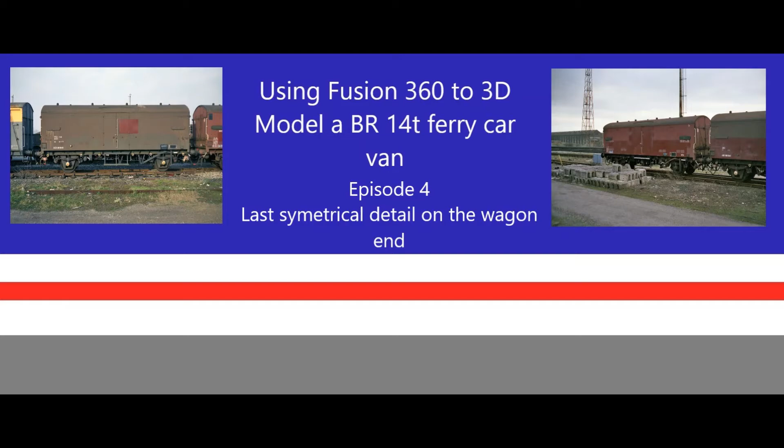Today's episode we're going to continue working on improving the detail on the end of the ferry van that we've been drawing. So first thing we're going to do is have a look at some pictures.

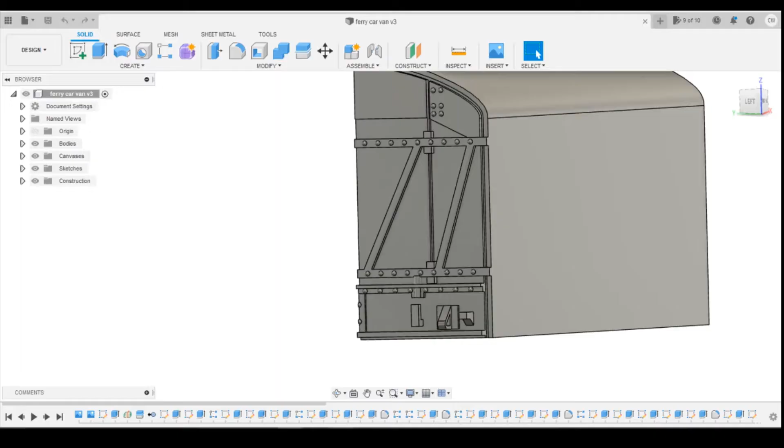I'm thinking of starting off by adding in some hinges around the top here and the bottom. So we're just going to create a sketch on the back surface here. Looking at the shape, we use a slight flat panel with a rivet on it, and then one that comes out above that. So we're just going to create a rectangle on the top here.

I think I'm going to go for 0.7 millimeters on that one. Oh, that snapped, unfortunately. Right, let's try again, go back into that sketch. You see it? Okay, cool. So 0.7 high, 0.3 wide.

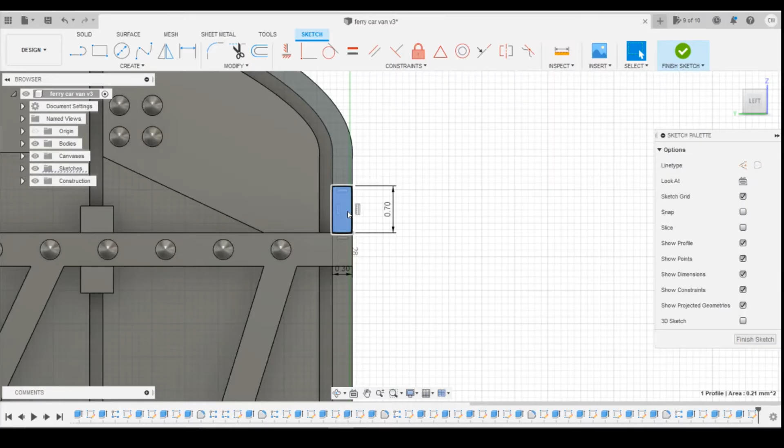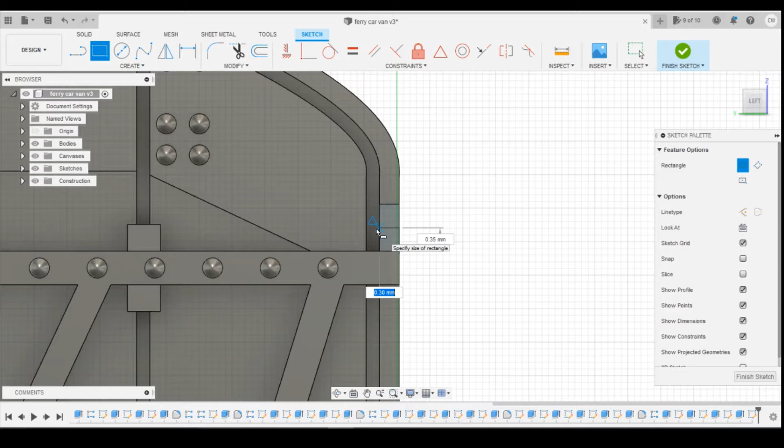Okay, and we'll extrude this just coming up slightly, I think maybe 0.15 would do. And create another sketch on there, again using the rectangle tool. I think I'm going to go with 0.3 by 0.35, and I'm going to extrude this outwards. I'm thinking 0.4 will look okay.

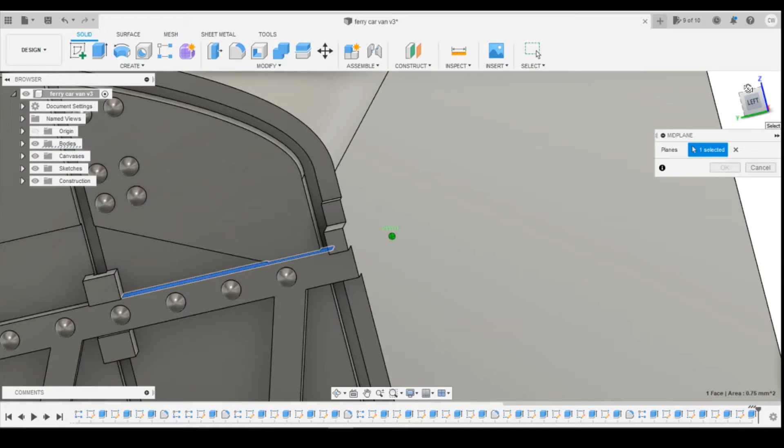And just to make life nice and easy, I'm actually going to put a midplane and copy what we've just done. Put a midplane between those two top and bottom surfaces there. Okay, and then we'll be able to copy this down. Actually, we will put the rivet on here first.

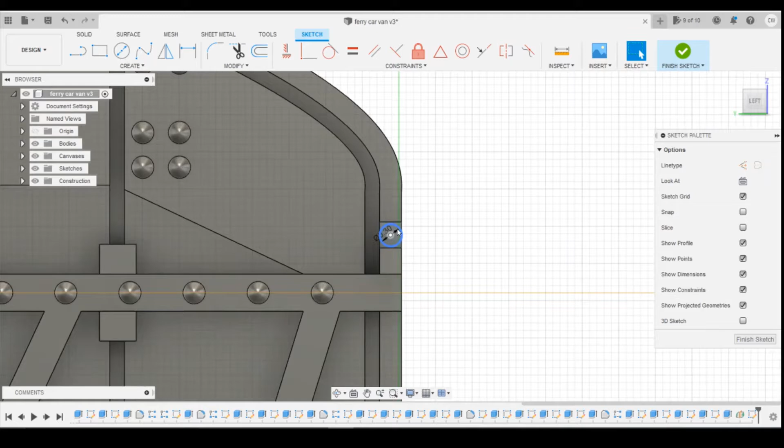Let's find the midpoint. Go 0.3 again. Extrude it 0.15 and then fillet off the top, 0.15.

Okay, and then as I say, we can copy or mirror this over. So, mirror, and then we're going to do features. I'm going to select, I also want that, and I'm going to mirror the plane across. Let's put the whole body over - we don't want that.

So let's do edit feature - that's already a new body, that's fine. Edit feature, and we'll do new body on that as well. Okay, that should work out.

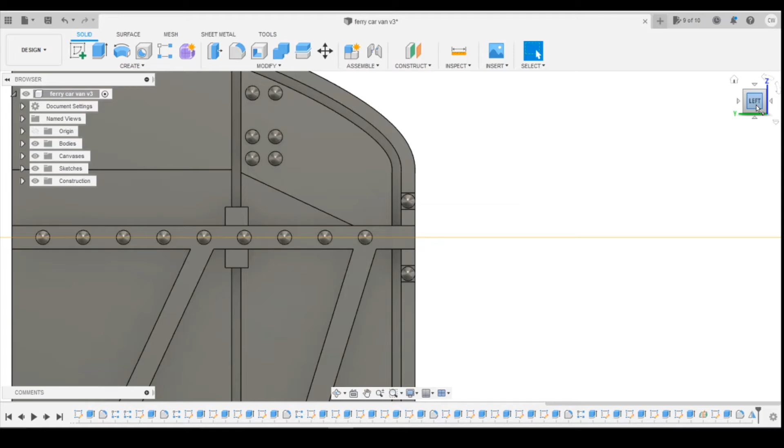So again we'll try that mirror, selecting that feature and the faces. Let's try again. Mirror plane, being the one just added there. Click on OK. Cool. So we can then turn that midplane off.

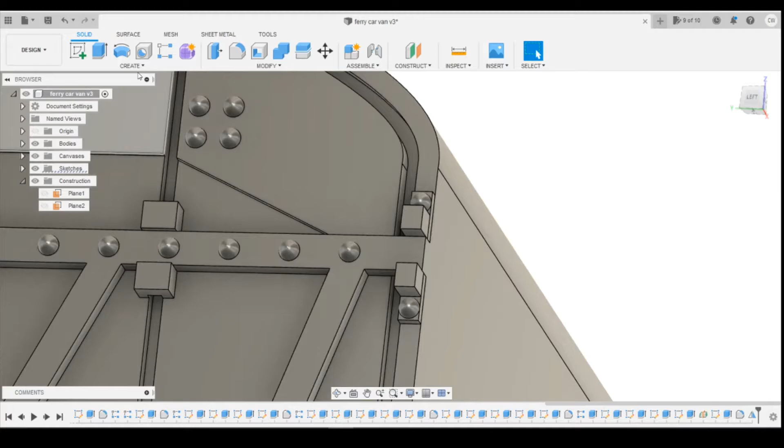And then I'm going to add in the middle here. In fact, let's finish that sketch and we'll delete that sketch. I'm going to add a drawing onto that side face. I'm going to slice through and put a circular profile, maybe 0.3.

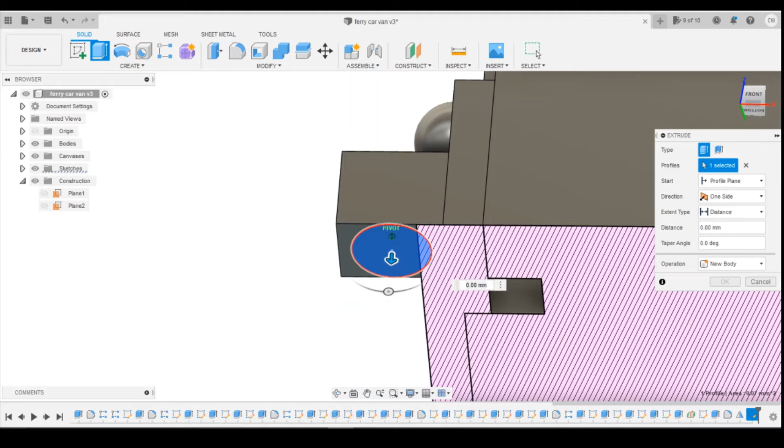I'm going to extrude that down, tell it to join. Okay, haven't gone far enough, edit that down again, and just drag it into the bottom of the hinge there. There we go, so we've got that now sorted.

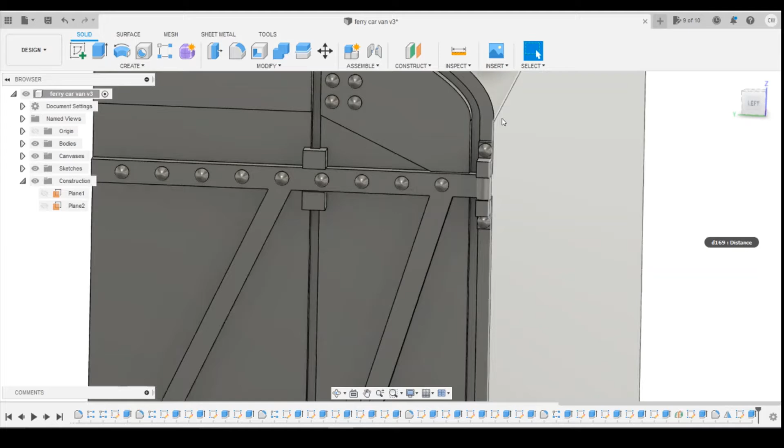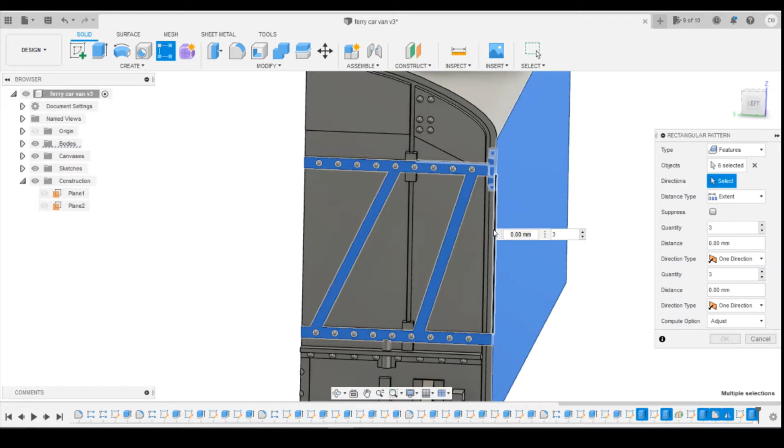We're going to copy the pattern. Select the features, I'm going to select all of these slots. Hopefully it won't do this. Direction down - it is.

So what's caused that? Let's have a look at this. Edit that feature there - that's fine. Could be, yes, that one. Edit that feature, tell it to be a new body. And then we can pattern all of this.

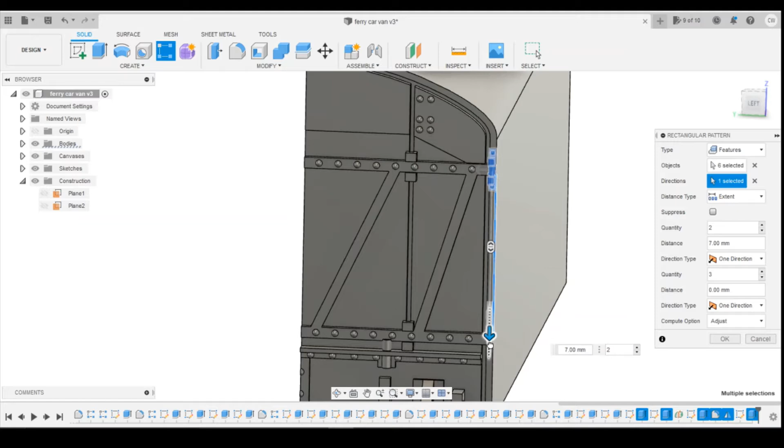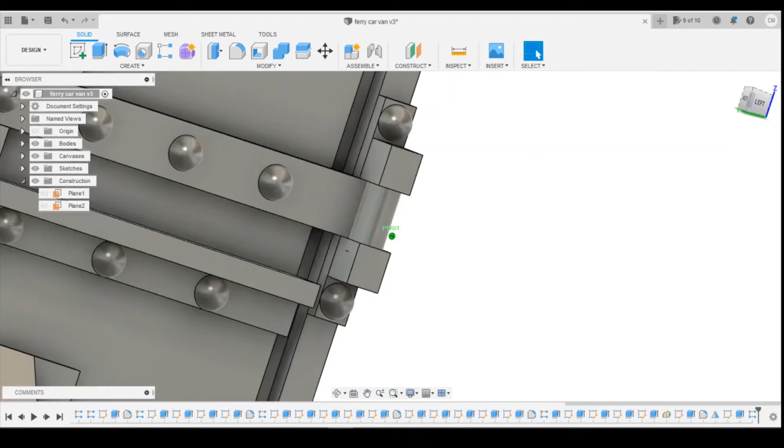There we go, let's select faces. Good, direction downwards, two of them. I think it was 7mm we came down last time - 0.75 actually. Yeah, there we go. Okay, that looks good to me.

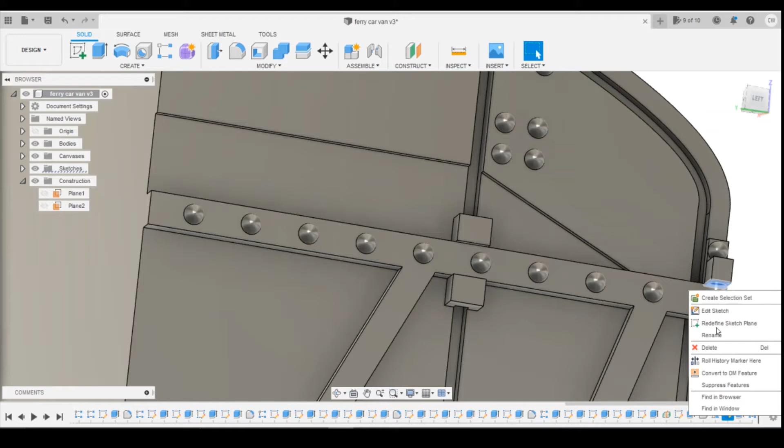It's weird that these are slightly sticking through here for some reason. Weird. Let me just edit scale on that one - I'm just going to reduce the diameter of them.

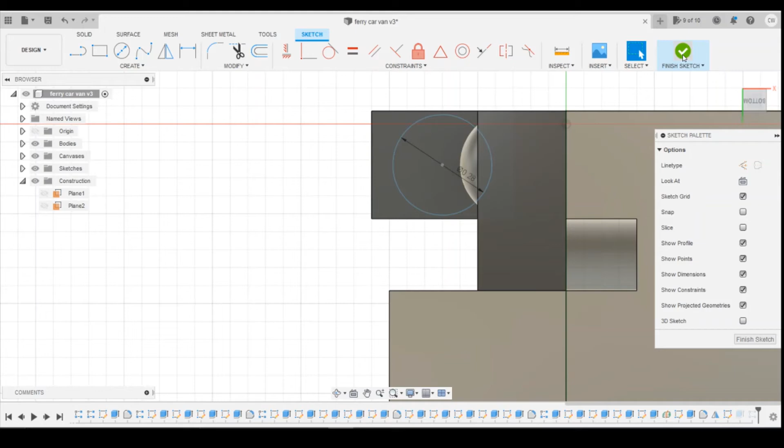So 0.25... 0.27... 0.28. Okay, so they're not hanging out now.

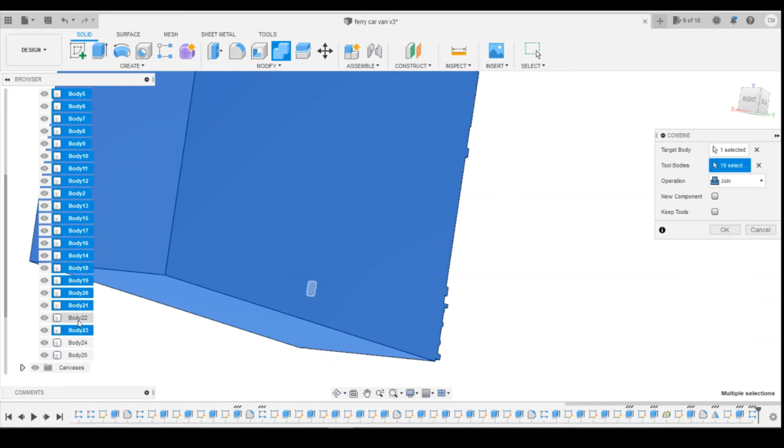That's good. Now if we check the bodies, do we have one? No, we've got lots. So we're going to keep body 2 as the original, combine, and we're going to add in as the tool bodies all the rest of them. Click on OK, that all joined together now.

Okay, so the next thing I'm going to add in is the handrail that's on the side here. So we're going to come onto the side and create an offset plane from the side face, and I'm just going to bring that in, say maybe 0.15, and put that in the middle of this face here.

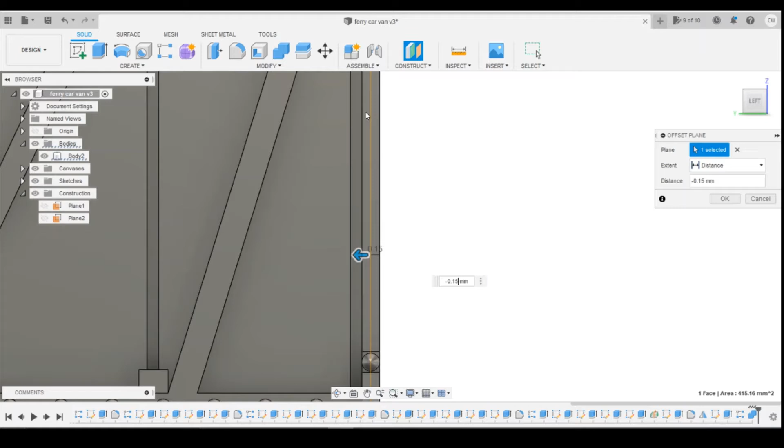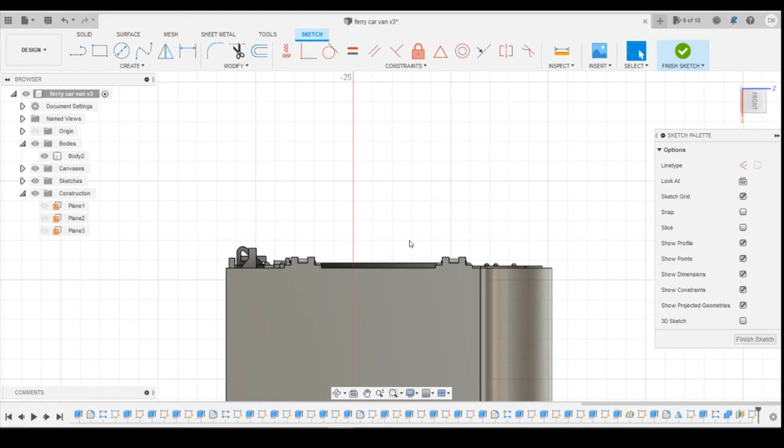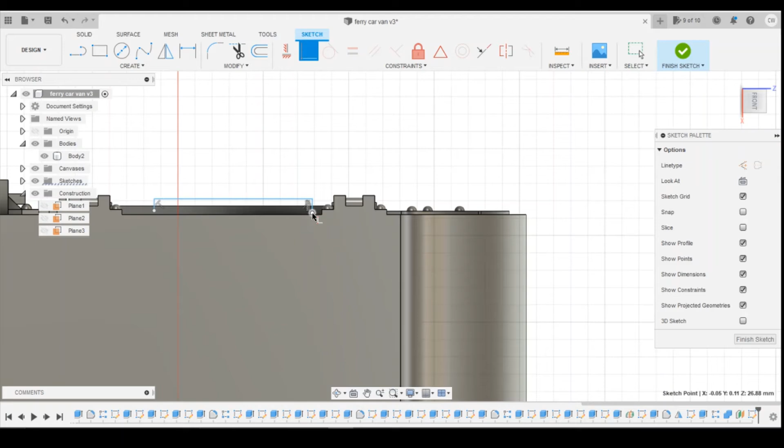So creating a line. I'm going to create a line upwards, across, and back down. Let's escape to get rid of that tool, and then we're going to coincide those two points like that.

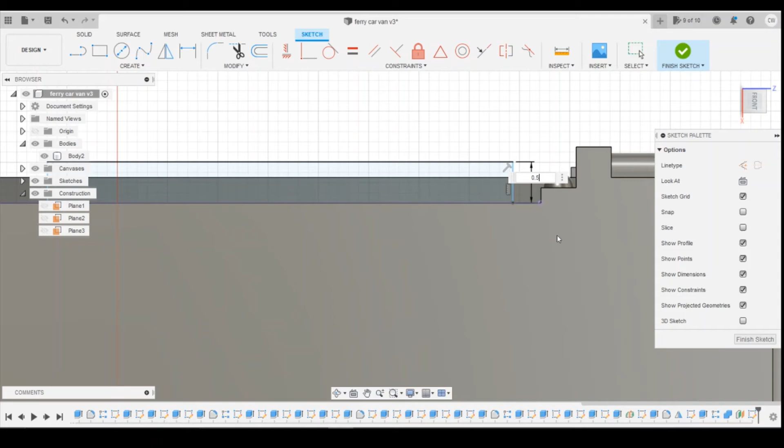Dimension wise, let's go have a look, see how high it looks. So it comes out sort of similar height to the hinge. At the moment it's 0.4, I'm going to go maybe 0.5, see how that comes up. Yep, looks okay.

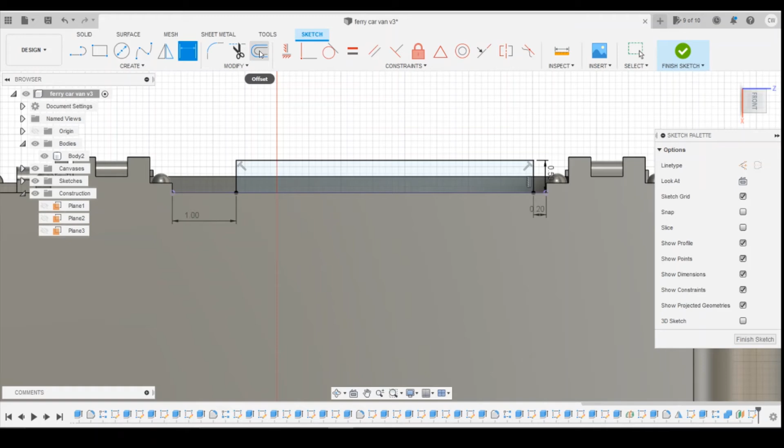Distance from the corner here, I'm going to go for 0.3. Actually no, 0.2, I want it really close to the top there. And from the bottom we'll go for 1mm. I'm then going to fillet it off the corner, maybe 0.15.

A bit more, I think, than that. Yeah, let's go for 0.3. Same on the other corner, 0.3.

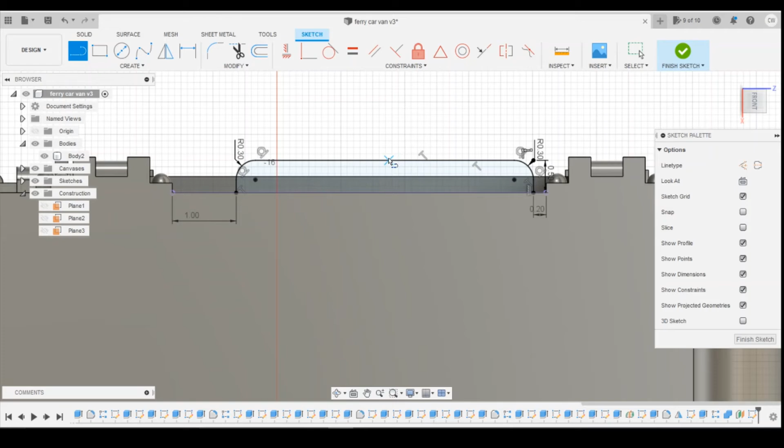And then I'm going to put a line. I'm going to find the midpoint of this. In fact, let's check that. Yes, it does look like the midpoint. Find the midpoint, and then drag back down to the bottom, finish sketch, and then we're going to use the pipe tool.

So we're going to select - you've got to do these individually again - so we'll initially start with the outside here. I'm going to go for 0.4 because I know that's about as small as I can get away with on handrails and things like that without them completely touching.

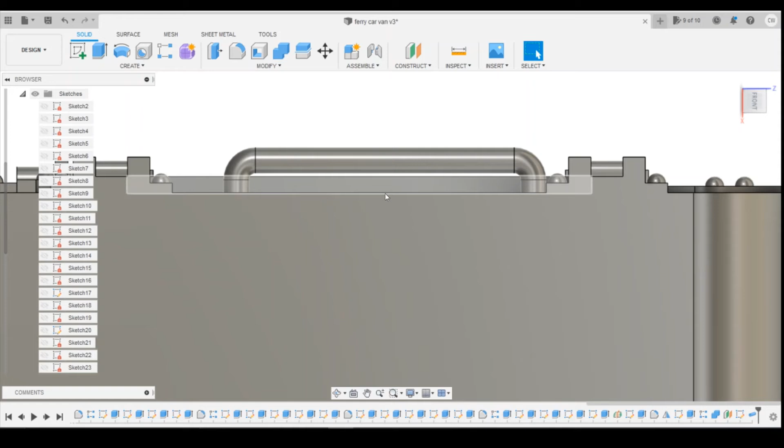Finish sketch, 0.4, pipe, and tell that to join also. Now obviously they're going to look a little bit overscale, but we do need to be able to print that and have it reliably print.

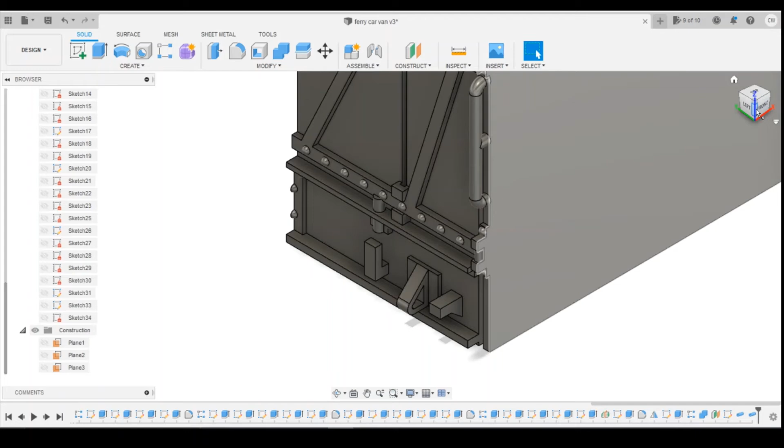Let's sketch back off. I'm wondering actually, maybe I'm just going to try - I'm going to go down to 0.3 on both of those, and we'll give it a try on the printer and see how it looks.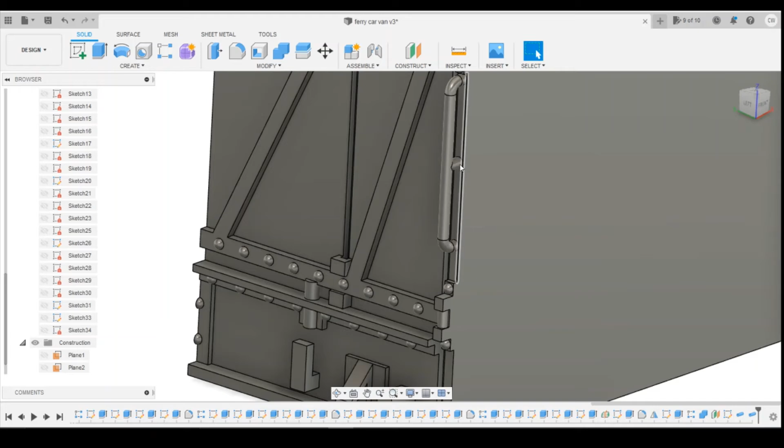And then we'll come back, and if it doesn't work initially, I can just cut this off and then put a piece of wiring on the initial print. And then for future ones, I'll just make it a little bit thicker if need be.

The next thing I'm going to add is what I think here maybe looks a bit like a locking pin on the side. So again, you're going to come down, create a sketch on this side profile,

using the rectangle again. Height wise, slightly higher than this part here that we've drawn. Add that in.

Okay, so distance from the bottom, let's go for 0.9. The height of it, it's not particularly big. Yeah, I'm going to go 1mm.

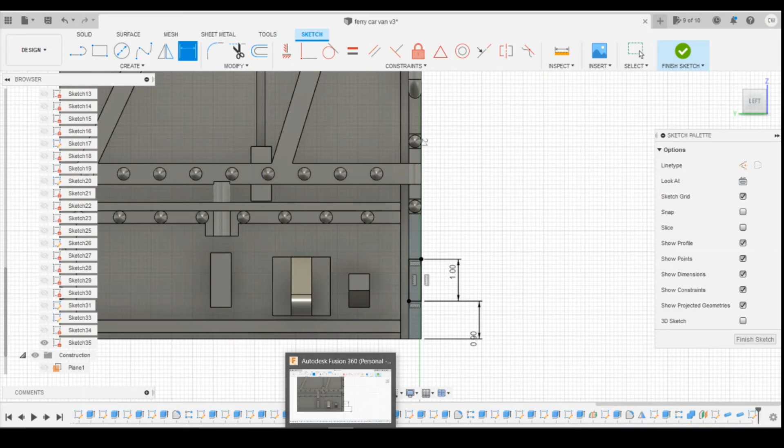Okay, so we'll just extrude initially 0.15, and then I'm going to create another sketch on the face, a rectangle on it.

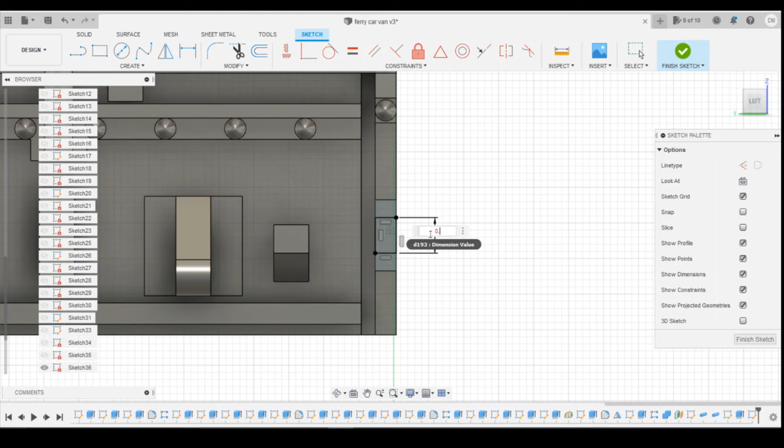I'm going to midpoint that rectangle to the face there. Dimension that 0.5 - look, actually probably want smaller than that, 0.3. And then we'll extrude out maybe 0.4.

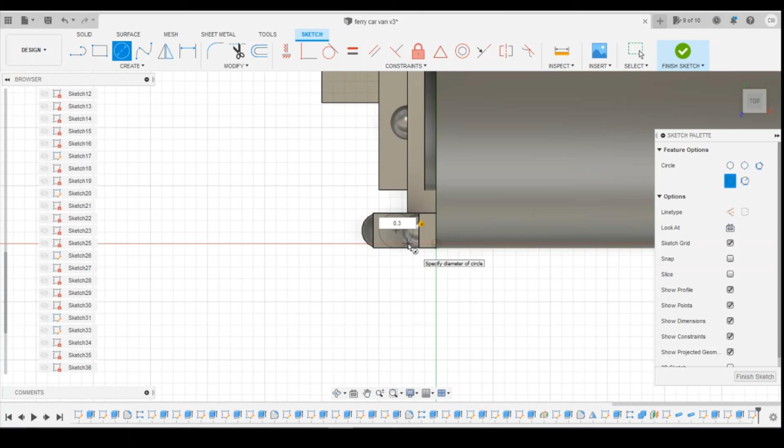And then on the top surface, so this will need a support when it prints, because there will be nothing below it for the printer to support to, so we'll have to add a support into this.

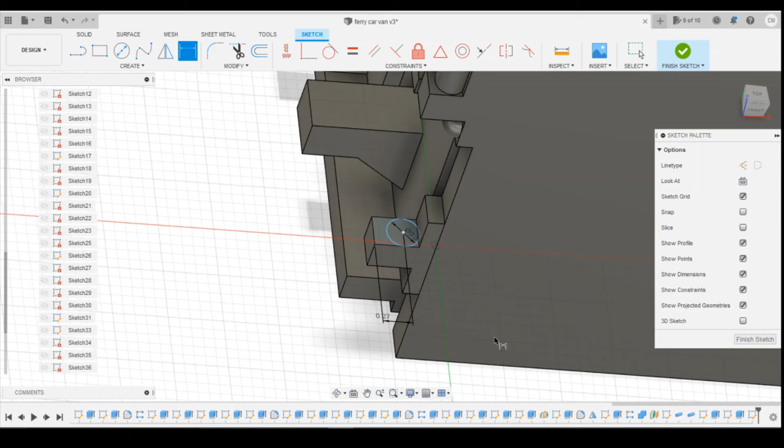Unless, of course, actually, let's edit this. What we can do is move it backwards so that it's actually touching the rear. So not quite prototypical, but it will mean that I won't have to put two supports on each end there, because it's touching the back already.

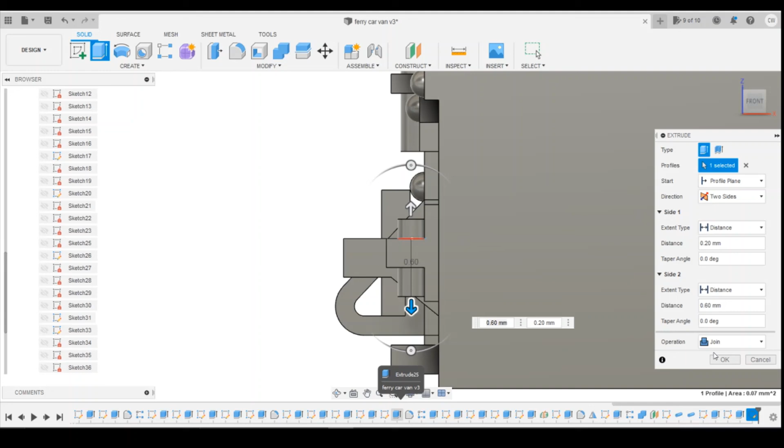There you go. So yeah, not quite exactly the same design, but as I say, I don't really want to put support on there because you will just blow that out being so small. So we'll live with that small compromise on that.

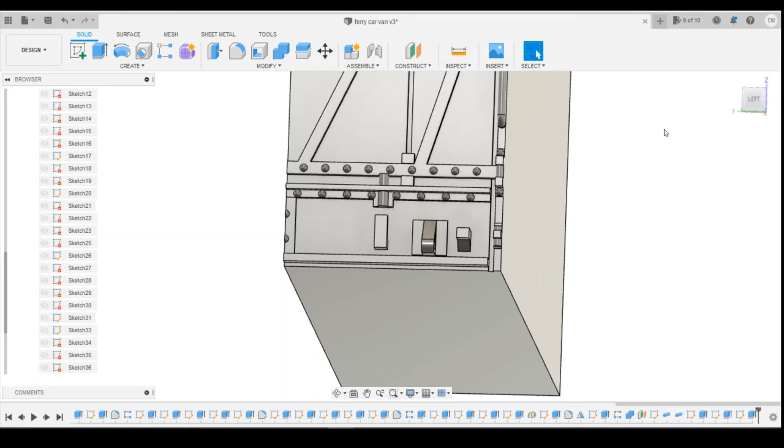Okay, so now having gone through all the photos, I think symmetrically wise, it's about as much detail as we've got to add on the end here. There is what I think is a locking handle that comes down here, but symmetrically that's not going to be of any use to us before we copy things over. So I'm just going to leave it at this point, and then we can come back and design that post once we've started mirroring this all around.

So hope you've enjoyed today's lesson. I think it's about 15 or 20 minutes there.